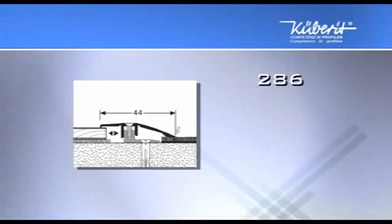The approved and high-quality PPS Champion profile system is a two-part screw system with a shifting slot for parquet and laminate height variation from 6.5 to 16 millimeters. The many-sided system is available as adapting, border and connecting profile.

The border profile comes in 4 different versions: Type 287, Type 287B with wide base profile, Type 287N with wide top profile, and Type 287NB with wide base and wide top profile.

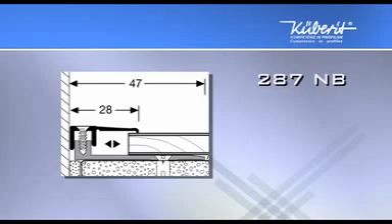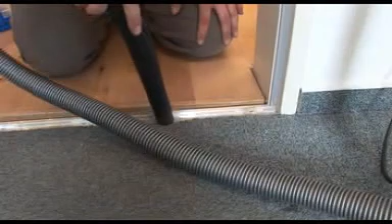Shown here is the laying of an adapting profile, as we have carpet on one side and parquet on the other. At first, the base profile has to be doweled and screwed. It's advantageous that all Kueberit base profiles are suitable for push-through mounting. While assembling the base profile, consider the required expansion joint that depends on the covering thickness.

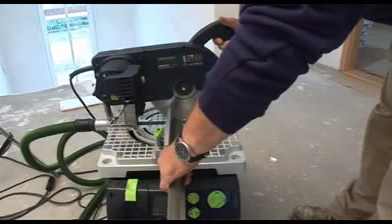Measure and cut the top profile before putting it on and fixing. Installation can be carried out with either a regular or cordless screwdriver.

Important to note is with all Kueberit screw profile systems to repeatedly gently tap with a hammering block between the screw holes. You will notice that the screws can still be retightened half a turn, which secures the Kueberit profiles with the best fixing and finishing, avoiding any protruding screw heads.

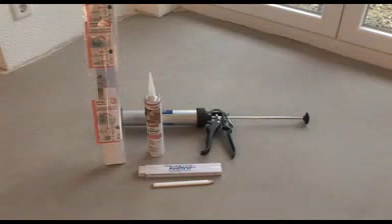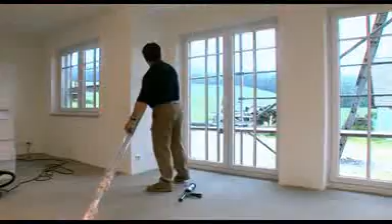Here we see the laying of a border profile in front of a terrace door. Besides screwing, adhesive flutes under all Kueberit basic profiles enable adhesion through applicable glue fixing. Before laying the floor covering, the base profile has to be cut and installed.

We see the holohedral adhesion of high-grade pre-finished floor. Still missing is the Kueberit profile for a perfect appearance.

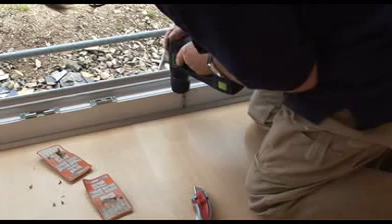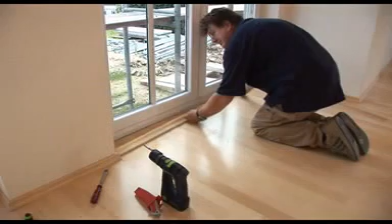PPS Champion profiles are also available with wood decor foils and real wood veneer. After fixing, the self-adhesive decor foils or veneer will be pasted on top of the profile. Please keep in mind that the surface has to be cleaned when the profile is fixed. After that, the veneer or wood decor foils can be glued on.

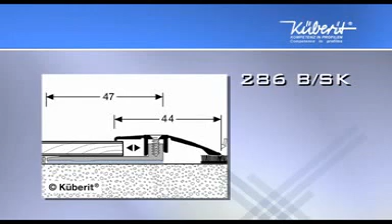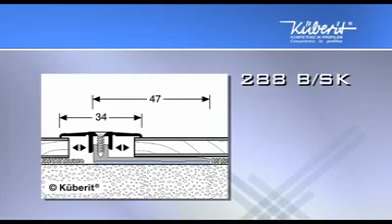Additionally, we offer this system in a self-adhesive edition. Therefore, the wide base profiles of the self-adhesive types 286, 287 and 288 can also be glued on. This alternative for fixing is best suitable for underfloor heating, and the fitter saves the time he normally needs for doweling and screwing.

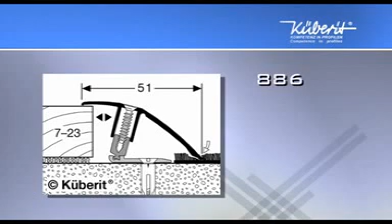As an advancement and supplement of the PPS Champion program, we developed PPS Champion Flex, a 3-part screwing system with a flex joint. It has a range from 7 to 17 mm for floors of equal heights. The joint is used for the adapting profile type 886 and the connecting profile type 888.

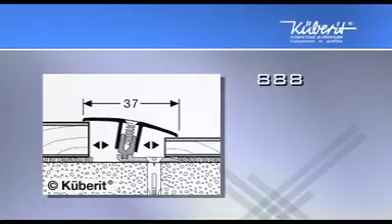The novel flex joint enables an optimal adjustment of inclination and automatically compensates differences in level of up to 12 mm. The normally essential tapping of the top profile is not applicable, and that saves time.

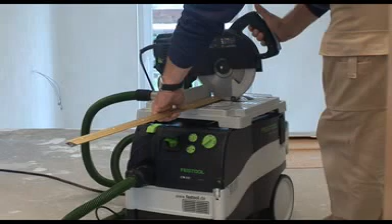The base profile has to be cut and installed before laying the parquet.

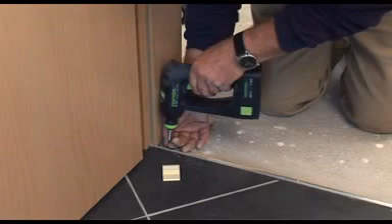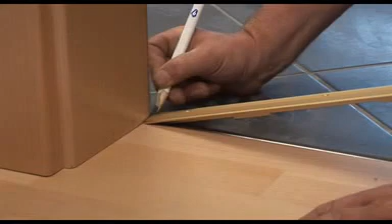After the laying of the pre-finished floor, the top profile needs to be measured. For architraves, you generally use a bevel for perfect measuring.

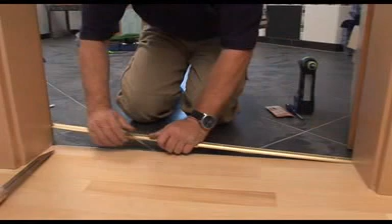The screwing of the top profile may be carried out with either a regular screwdriver or, as shown, with a power screwdriver. But keep in mind that the power screwdriver should be fitted with an adjustable torque.

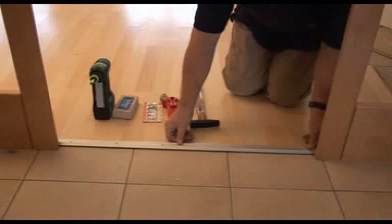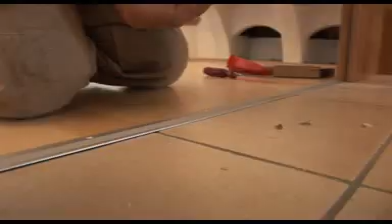A perfectly laid Kueberit profile. Screws are always flush with the Kueberit profile systems. No risk of stumbling.

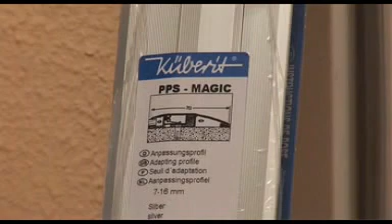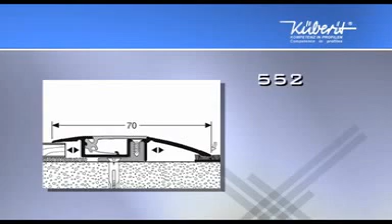PPS Magic is the first worldwide profile system with tension spring for parquet, laminate and cork that features an invisible fixing. We deliver the adapting profile type 552, the border profile type 550 and the connecting profile type 551 of this innovative novelty.

Here we have the classic problem. A cable was laid under a door with an unsuitable profile. First of all, the old profile is removed and the cable exposed. Now the simple laying of a PPS profile system of Kueberit follows.

Initially, the base profile is laid. With the patented profile system PPS Magic, we can lay the profile afterwards and then hide the cable correctly.

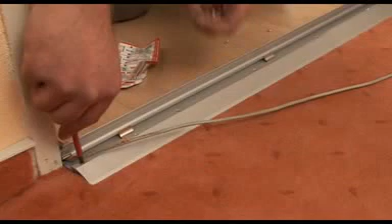After cutting the top profile, it will be screwed and then the cable laid into the corresponding cable conduct. The flap with the lift-up mechanism is closed and now the cable is secured perfectly against damage.

In the cable channel, multiple smaller cables or a regular three-phase cable can be hidden. The flat structure of this system prevents stumbling perfectly.

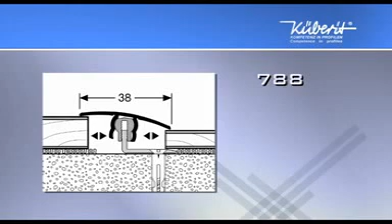The worldwide unique 3-part aluminium clip system with 2 swivel levels for hard floor coverings that's adjustable to all floor levels from 7 to 18 mm.

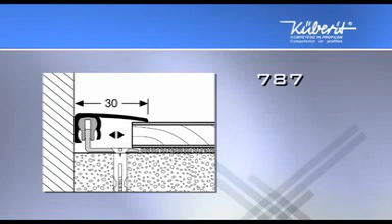Due to the novel guiding ridge with safety raster and the 2 swivel levels in the top profile, the connecting profile can automatically compensate differences in levels of up to 12 mm. In the case of our adapting profile, even a compensation of 23 mm to 0 mm is possible.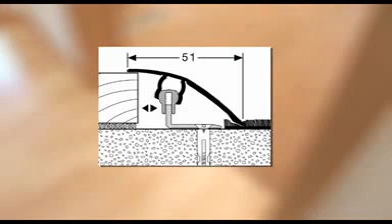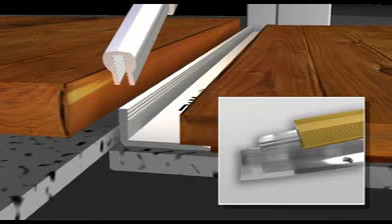When installing FCS 718, take care that the guiding ridge is inserted into one of the 2 swivel levels of the top profile according to the thickness of the floor covering. For architraves, we recommend shortening the guiding ridge by about 3 cm. Afterwards, install it laterally down on the base profile with a clearance of 1.5 cm.

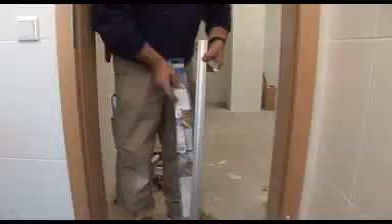Then push the top profile and clip it on. The laying of the flexible clip system FCS 718 occurs in the same way as with all other Kueberit profile systems.

First of all, the base profile is screwed with the aid of a push-through installation, or, for example, glued down with appropriate glue when using floor heating.

Then adapt the hard floor covering. It's very important to pay attention to the prescribed expansion joint.

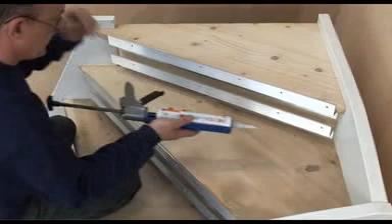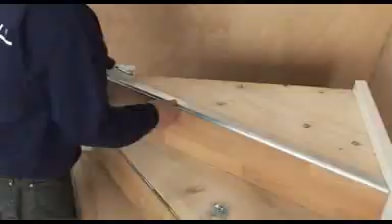Then adapt the base profile from the front with the stop angle, mark the drilling holes, pre-drill and screw together. Now the step riser is done. Afterwards, lay all the step risers.

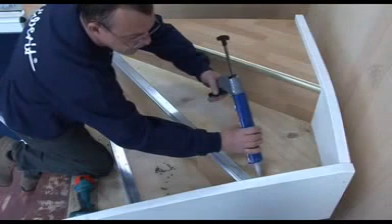Apply some glue on the step tread and glue on the fitted floorboard. Pay attention that the thickness of the glue compensates the thickness of the base profile.

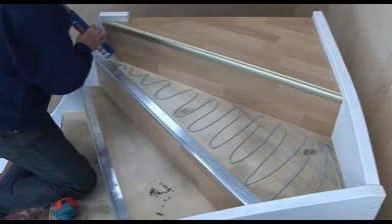In the last step, the top profile is placed and screwed. Finished.

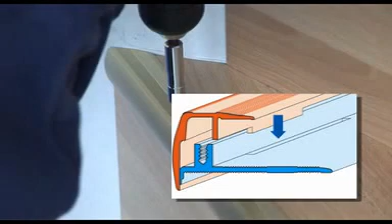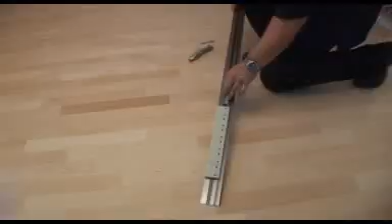In our high-grade aluminium baseboard skirting collection, we offer the frequently laid Type 935 as a system winner. The linear modern design of this high-quality aluminium baseboard has been developed for use in commercial and residential areas.

The two-part system with practical triple cable channel is delivered with wall clip holders as well as screws and dowels.

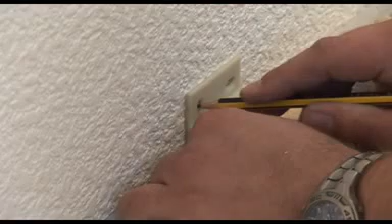First, the wall holders made of glass fibre reinforced plastic are mounted onto the wall at distances of approximately 40 to 50 centimetres.

Then just clip on the baseboard.

Suitable internal and external corners, end caps left and right, connectors as well as 135-degree corners made of high-grade aluminium are also available.

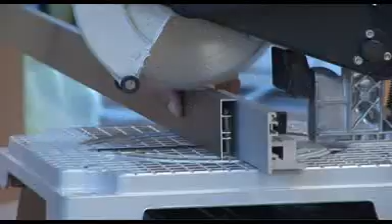Here, a connector is slid on the baseboard through a pre-assembled pin before the baseboard is slid on from the opposite side.

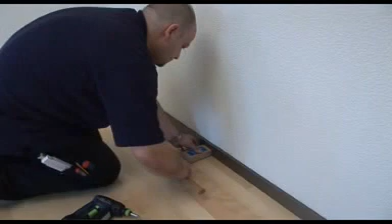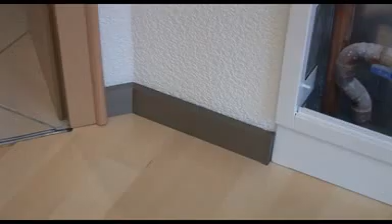We see a completely installed aluminium baseboard in stainless steel, fine-grinded optics.

Under the EB profile concept, Kueberit now combines straight aluminium, brass and stainless steel profiles for ceramic and screed surface installation.

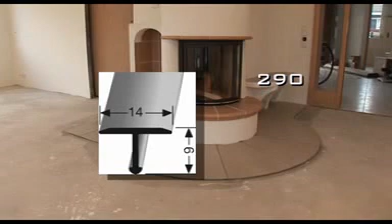Here we see a classic application for the T-profile Type 290. A tiled curved fireplace with an expansion gap which needs to be professionally covered.

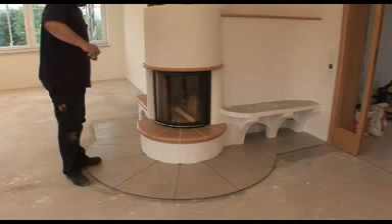Before laying the parquet floor, it's essential to measure the required radius.

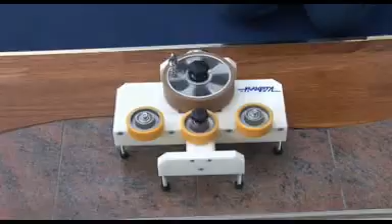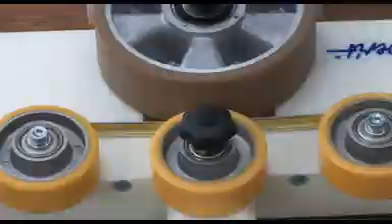The bending of a profile with the advanced Kueberit bending machine makes fixing simple. The profile is inserted with the desired initial tension adjusted by turning the hand wheel. The profile is bent in a cold condition by turning the wheel crank until the desired radius is created.

The T-profile can also be bent with the Kueberit bending machine. Note that to bend the profile to the desired radius, you have to start with a wider radius and reduce respectively to a smaller one.

The parquet is glued and fixed. After laying, there's just one thing missing for the perfect result: the T-profile.

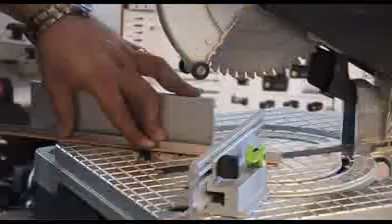In this case, the fixing occurs using inserting glue, which is injected into the joint.

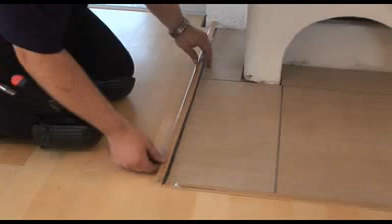Finally, the profile is fixed. Done.

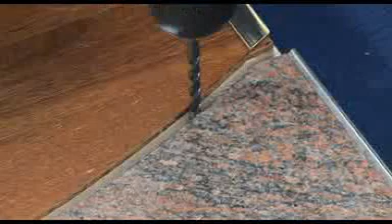When fixing with rib dowels, at first holes are drilled at regular intervals. The dowels are placed in the desired position on the T-profile, and lastly, the profile is tapped into place by using a hammering block. Done.

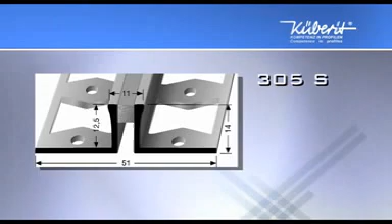305S. Laying of the heavy-duty expansion joint profile type 305S with tear-proof silicone joint in grey.

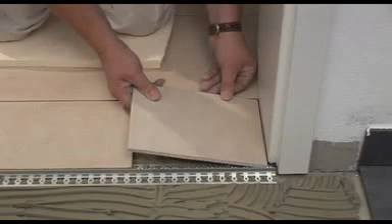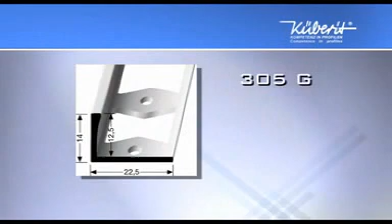305G. Here we see the installation of a double-edge profile type 305G for straight laying.

The product group Kueberit Best contains all profiles for textile and resilient floor coverings, as well as one-piece profiles for parquet and laminate.

The extensive assortment includes a wide range of profile solutions made of aluminium, brass and stainless steel.

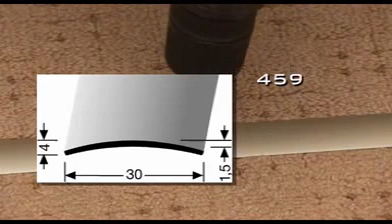In case of an already laid carpet, the problem of a frayed-out carpet fringe can be avoided by installing the connecting profile type 459. So it doesn't matter whether the profile is screwed or glued.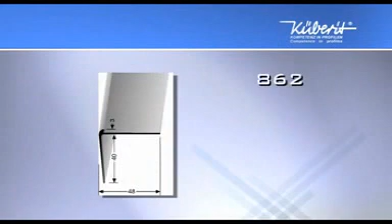Our stair nosing profile type 862. A high-quality PVC flooring will be laid on a worn-down wooden stair.

To compensate a possible unevenness at the stair edge, Kueberit repairing angles are used, in this case type H20, in keeping the profile straight.

Now the stairs need to be cleaned and wiped.

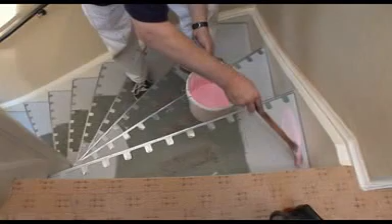First of all, you need to prime and then apply the body filler evenly.

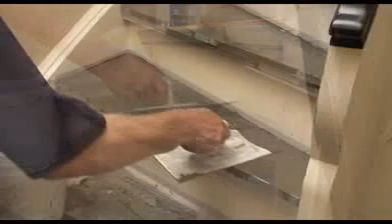After filling the stairs, the profiles have to be cut to size and screwed.

Now put the glue and lay the fitted coverings onto the steps, whereby the protruding profile angle prevents wear and tear on the stair edges.

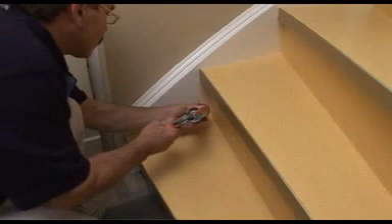The result is a perfectly renovated stair, thanks to the use of a high-quality Kueberit profile.